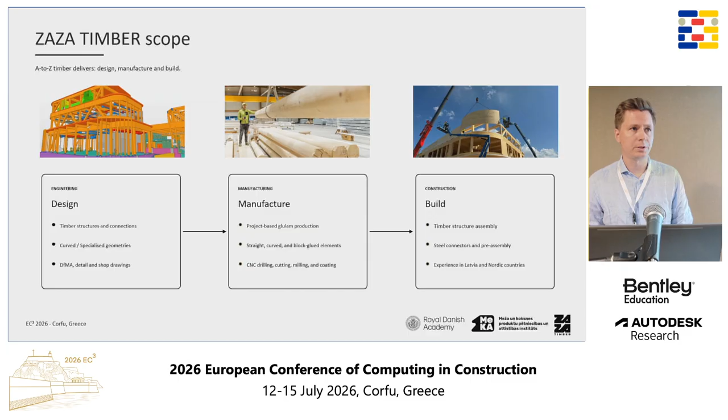So they also have an established track record of design build of mass timber projects across the Baltics and the Nordic countries. That also feeds into this. So as projects have become increasingly complex, the company established an R&D department to convert one-off project challenges into reusable methods. And the goal of this department is to bridge engineering, factory production, and research so that new workflows can eventually become standard practice within the company.

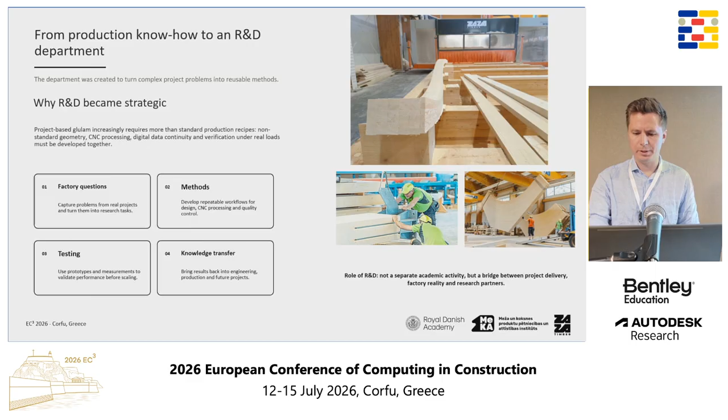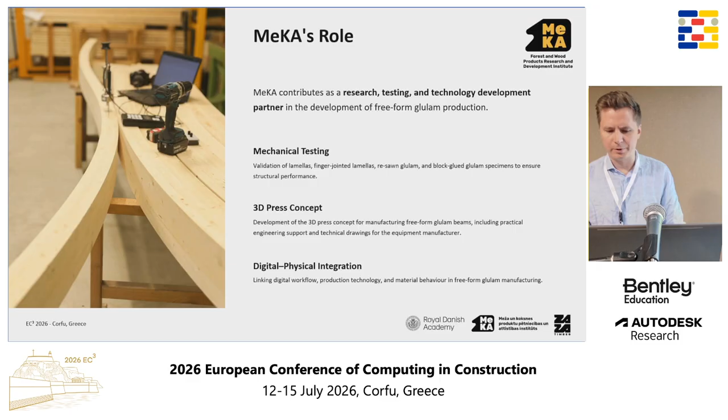Then we have the MeKA, or the Forest and Wood Products Research and Development Institute, also in Latvia, which contributes research and testing expertise. And they support the project through mechanical testing, prototype validation, and the development of the process technology itself, ensuring that the digital workflow corresponds to the physical behavior that we see in the actual material that we develop. In this project, MeKA is responsible for several complementary activities, developing the 3D press concept alongside the digital workflow, carrying out the mechanical testing of the different Glulam specimens, and connecting the digital models with the physical manufacturing process.

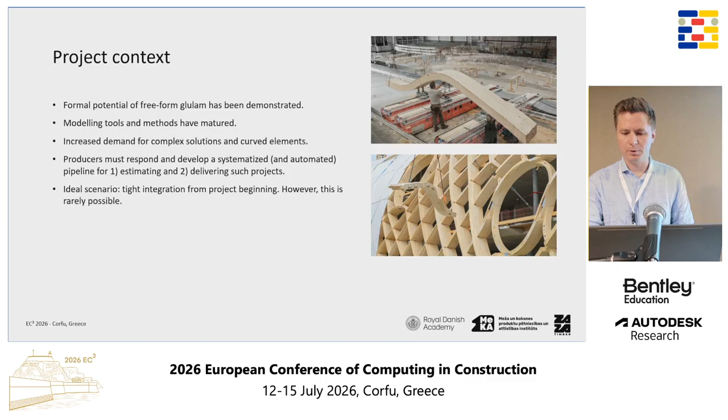So of course, while the ideal scenario is that the producer works closely with the design team from the very beginning of the project, as we all know, this is not always possible, or actually rarely possible. Because in practice, manufacturers often receive incomplete or simplified design models at the bidding phase, IFC files, and still need to determine if the project is manufacturable or how it should be produced.

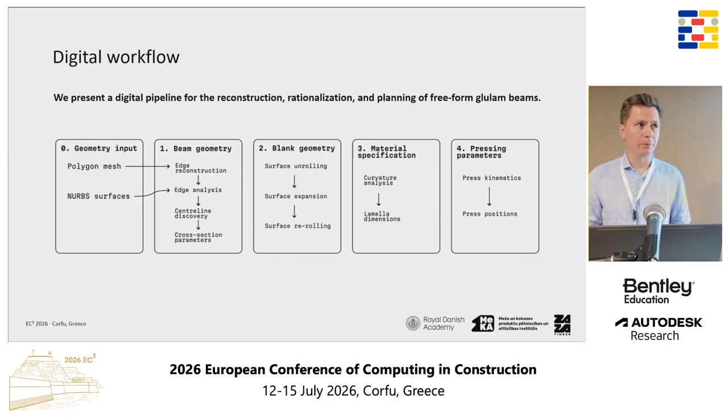So we address this gap through a digital workflow for the reconstruction, rationalization, and planning of freeform Glulam beams. We start with different types of received design input, reconstruct an idealized beam geometry. We calculate the Glulam blank geometry, which is the manufacturing geometry that is actually produced, and we finally generate the material specifications and other information needed for fabrication. So the objective is to create a continuous data flow from architectural model to the factory floor.

And here the key challenge comes from the manufacturing process itself. So unlike single curved glulams, which are well understood, double curved glulam is typically produced through two sequential bending operations. So first you make a single curved shape, then you slice it and you bend it out of plane. And during the lamination the individual lamellas slip and slide relative to each other, and this causes the cross-section to become skewed in kind of complex and variable ways, depending on the geometry.

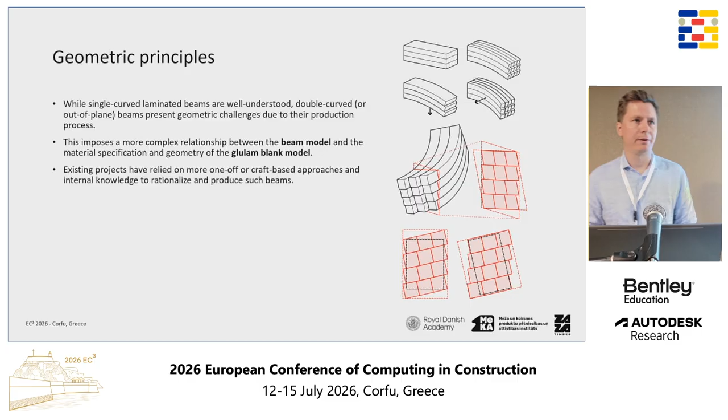So that means that the geometry that we manufacture, which is the Glulam blank model, is not identical to the final geometry of the target, the beam model. And this relationship has traditionally relied heavily on tacit experience, internal knowledge, manual interpretation, and very craft-based methods. And this problem is also compounded because design information is rarely ideal, as I mentioned before. Manufacturers are often involved only after the design is largely complete, and the available geometry may consist only of coarse solids, simplified representations, meshes, or sometimes overly detailed elements.

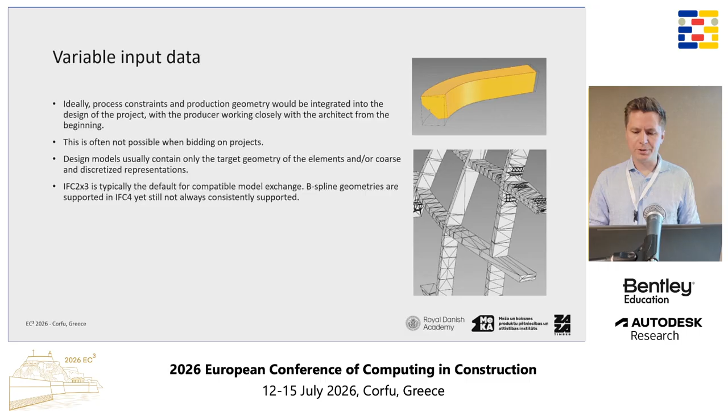So just a couple examples from projects in the images there. So a detailed NURBS model and a coarse mesh extracted from an IFC model. So our workflow therefore begins by reconstructing a usable geometric model from whatever information is available. The first stage is geometric reconstruction.

We use a heuristic to identify the most likely beam edges and generate an approximate sweep, a kind of idealized rectangular sweep with a constant cross-section that becomes the kind of ideal beam geometry that encompasses the design target. The beam surfaces are then unrolled into flat space, or otherwise the kind of local curved space of this idealized beam. And then from there we calculate how much skew develops during manufacturing and what are the extents, how much do we need to expand the input material by to make a good blank.

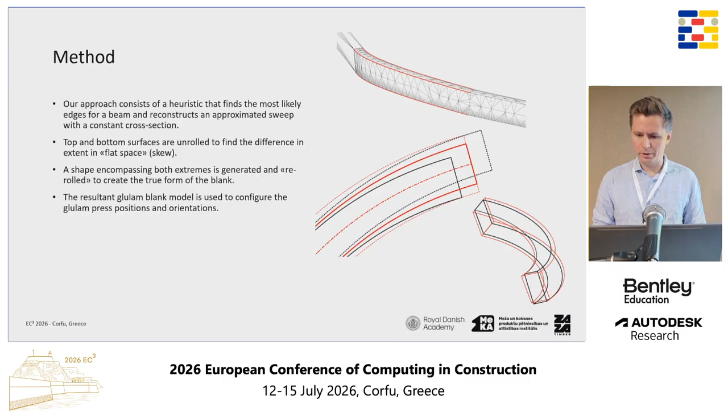So from this information we generate the actual Glulam blank, the geometry that must be pressed, so that after deformation it encompasses fully the target beam geometry. And then finally this blank model is used directly to position and orient the press. Now the same model also provides material specifications because from this then we can pull out all the necessary data we need to make sure we're within material limits.

Maximum curvatures in the Glulam blank model are analyzed and related to allowable strain limits that are derived from Eurocode requirements. And then this determines appropriate lamella dimensions. We've also done some preliminary studies using 3D FEA of the bending process to identify strain values through simulation. That's quite early at this stage.

And then at the same time, we have a parallel study that's following the material properties of individual lamellas throughout the production chain. So at each process step, to understand how each process step affects key performance indicating properties of the input material. And the kind of merging of the two suggests that future versions of the workflow can also better connect geometry with these changing material properties throughout the production process.

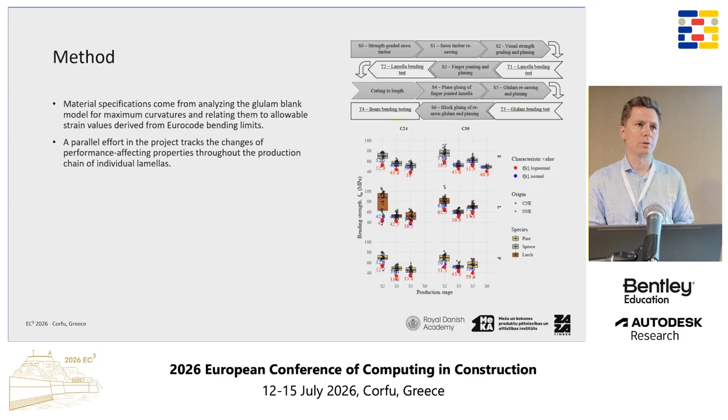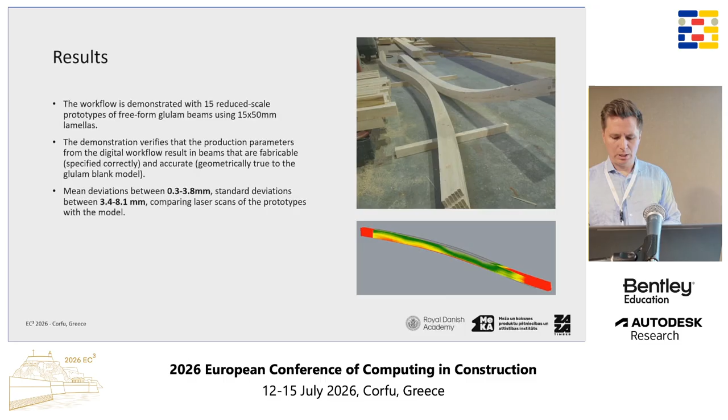So across the specimens, we achieved a mean geometric deviation ranging from roughly 0.3 of a millimeter to just under 4 millimeters, demonstrating that the automatically generated production parameters produce geometrically accurate beams. And then if we look a little bit closer, 9 of the 15 prototypes had over 90% of the measured points within 10 millimeters of the digital model, while 4 prototypes had over 70% of their points within 5 millimeters.

And we also observed that due to the pressing sequence of the production process, the second pressing stage consistently produced larger deviations, suggesting spring-back effects in the thicker lamellas, which would need to be accounted for in future simulations. And from the prototyping and validation, we also see that integrated quality control emerges as an important next step in the digital pipeline, probably through some sort of integrated scanning or other kind of detection system that we can also connect to the digital workflow.

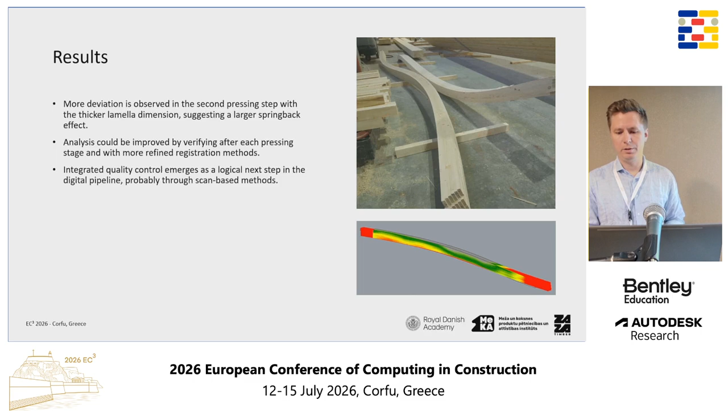Alongside the digital workflow, the production equipment is being developed in parallel. So the press itself is an array of articulated jaws that are independently constructed, and this has implications for the digital model because that means that the kinematic model can be separated and thus solved directly, so we don't need any kind of complicated kinematic model of an entire press chain.

And so the same Glulam blank model generated by the workflow directly defines the position and orientation of each pressing head, again, tightly linking digital design with machine control. Our next step is to connect the limits of the press more closely with the range of possible forms, and to also look at how the press itself can be motorized to make this data flow even more seamless.

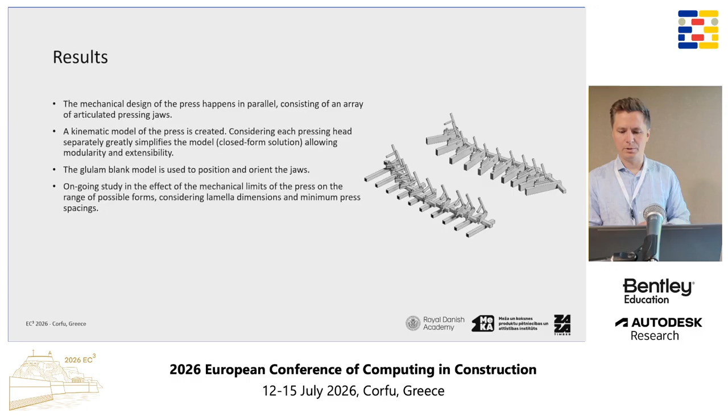So to conclude, we ultimately envision a fully automated industrialized process for fabricating freeform Glulam beams from coarse input data. We've demonstrated a digital workflow that transforms variable architectural input into manufacturable freeform Glulam production data. The prototype study shows that the generated parameters are sufficiently accurate for fabrication, while also identifying where improvements are needed.

And then looking ahead, we see opportunities to integrate quality control feedback, improve the relationship between material behavior and process planning, and eventually incorporate other methods such as statistical analysis, machine learning, etc., to rapidly estimate production parameters from previous projects.